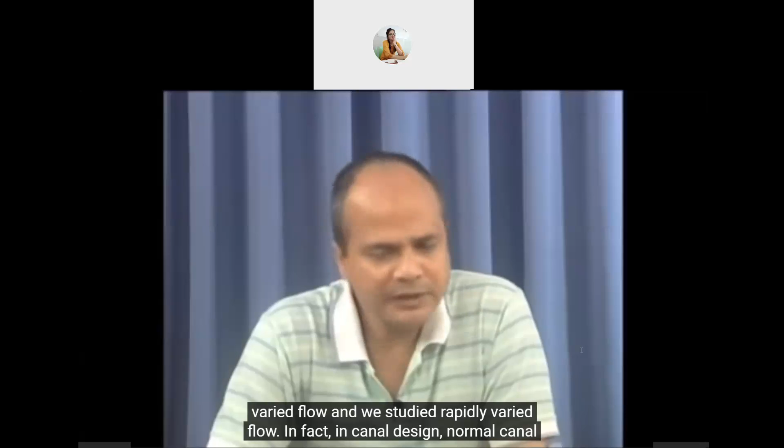Then of course we studied gradually varied flow and rapidly varied flow. In fact, in normal canal design, this gradually varied flow and rapidly varied flow concept doesn't come directly, but suppose in a canal we have a barrier upstream or downstream, then there will be some gradually varied flow profile forming, and in that case, for normal condition when we are designing a canal, suppose we are getting a particular depth in it.

Now suppose we think there may be some obstruction downstream, and in that case some gradually varied flow profile can be forming, and in those situations what will be the additional height required over the computed depth of uniform flow - those things may be required. Similarly rapidly varied flow also we may have to see where the hydraulic jump may be forming, and the concept of rapidly varied flow is also required in those situations.

Suppose we are narrowing down the canal to a very small width, then sometimes we need to see whether there will be afflux on the upstream, whether there will be a varied flow just near that constriction. So those aspects also we need to know.

When we are talking about design of canal, we should know that there may be channel. When we were discussing classification of channel, we mentioned that there can be natural channel or artificial channel. Natural channel is what we get in nature, like river or stream, and in those cases this concept of canal design or channel design might come in some issues where we are designing some hydraulic structure, and there may be some approach channel which is otherwise natural, but we need to maintain some of the conditions there.

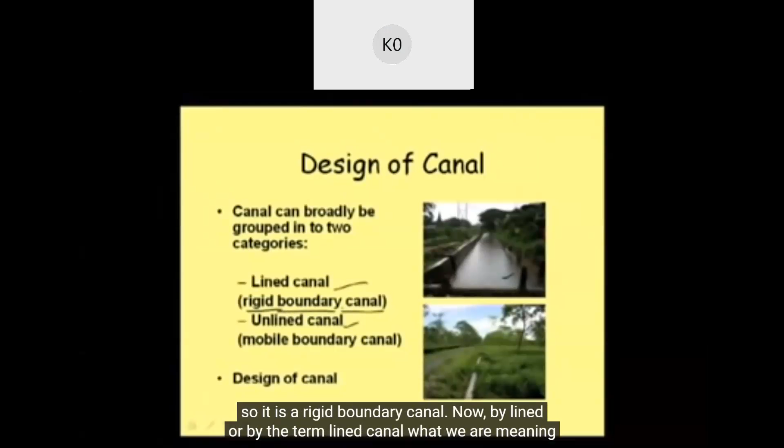By the term lined canal, we mean that during construction, we are providing some lining to the boundary of the canal, to the sides and the bottom. Those walls can be concrete, or sometimes we may decide to provide a wooden boundary. In hilly areas, I have seen people providing bamboo lining also. In some experimental situations, people may provide plastic lining as well.

If we are trying to carry some very important item, then it can be steel lining also. So canal lining can be of different types, and when we are providing those linings, we are referring to this as a lined canal.

Another point we should know is that by lined canal, our design concept is that this canal will not be eroded by the flowing water. So we completely avoid the thinking that this canal is ever going to be eroded, and other requirements will be deciding the canal design.

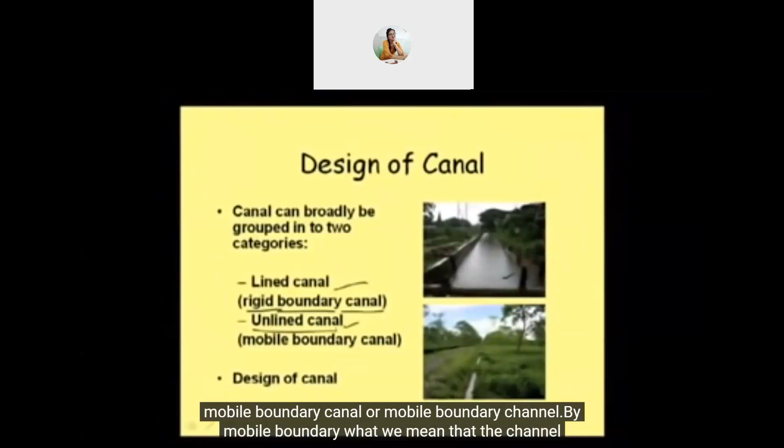When we talk about an unlined canal, we are talking about a mobile boundary canal or mobile boundary channel. By mobile boundary, we mean that the channel bed and sides can get eroded.

When we talk about this situation where it can get eroded, that depends on various parameters like the flow velocity, how much erosion can occur, what type of sediment the bed and bank are constituted of, the saturation condition, and particularly the formation through which the canal is passing.

Sometimes it may be an alluvial formation, meaning the bed material is silt or sand, and in that case it may be more susceptible to erosion. In other cases, the canal may pass through a non-alluvial formation, such as clay, where the susceptibility to erosion may be less.

But it also depends on whether, upstream, there is something because of which the water flowing through the canal can carry sediment. We need to ensure that this sediment does not get deposited into the canal and block the path. So all these issues come into play.

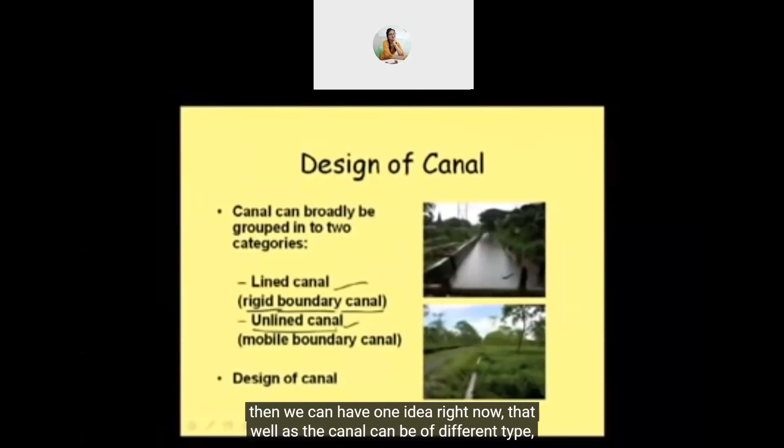With this understanding, we can now see that as the canal can be of different types, the design concept for these different types of canal will of course be different. So let us see what can be the design concept of a lined channel.

Okay, what can be the design concept of a lined canal? First, let us talk about rigid boundary canal, meaning which is not mobile. The boundary is rigid, meaning it is a lined canal.

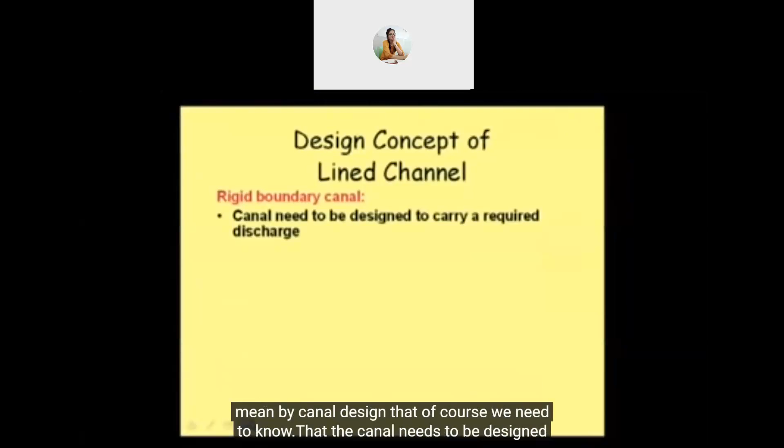First point, what we mean by canal design: of course we need to know that the canal needs to be designed to carry a given amount of discharge. First, from other criteria we should know what is our requirement. The basic requirement of a canal is that it should carry this much discharge, that is the volume of water that needs to be carried. So we need to design this to carry that sort of discharge. Now when we say we are designing, what are we basically doing?

Discharge is given, and then the slope of the channel. When we say this is our design canal, what do we need to give? We need to say, okay, this is the bed width of the channel that needs to be provided, this is the depth of the canal that needs to be provided, and of course we can say this is the shape. It can be rectangular, it can be trapezoidal, it can be triangular, it can be circular. So different types of shapes we may suggest, and our design may involve all those things.

Then we can suggest, well, this canal will have to have a slope of this much. But when we talk about the slope, we can see that the slope of a channel depends on the topography. That means we have hardly much scope to play with that particular parameter. We need to design a canal in a particular locality or location to carry discharge from one point to another, so the natural slope or natural topography will guide what should be the slope. There we can play by a very small amount.

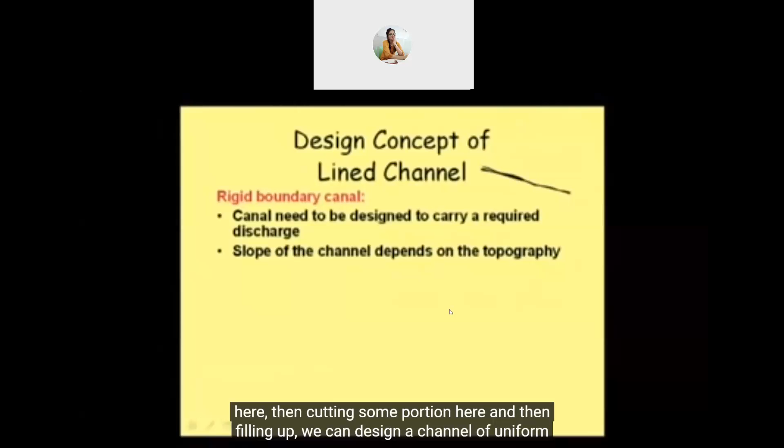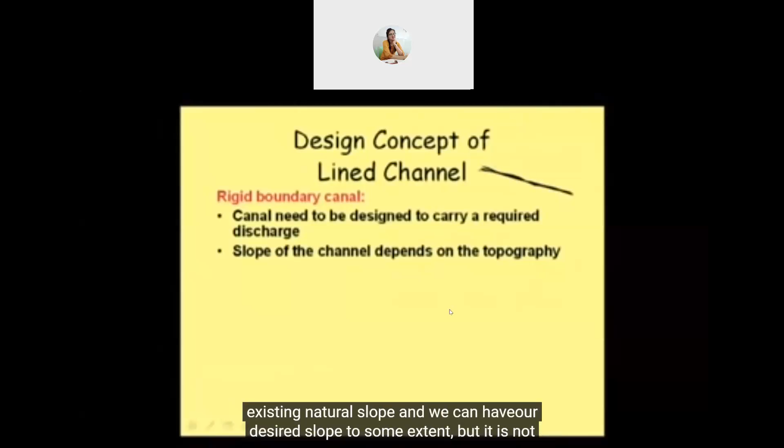For example, say this is the canal and the natural topography is suppose like this. We may not design a canal like this and then that and in this way. But we can design a canal by filling up some portion here, then cutting some portion here, and then filling up, so we can design a channel of uniform slope. So marginally we can change the existing natural slope and have our desired slope to some extent, but it is not that we can change the slope grossly.

So generally when we talk about design of canal, we do not think we have enough opportunity to manipulate the slope. So we will assume this is the slope, or we will take the natural slope as our slope, and then we'll proceed for the design.

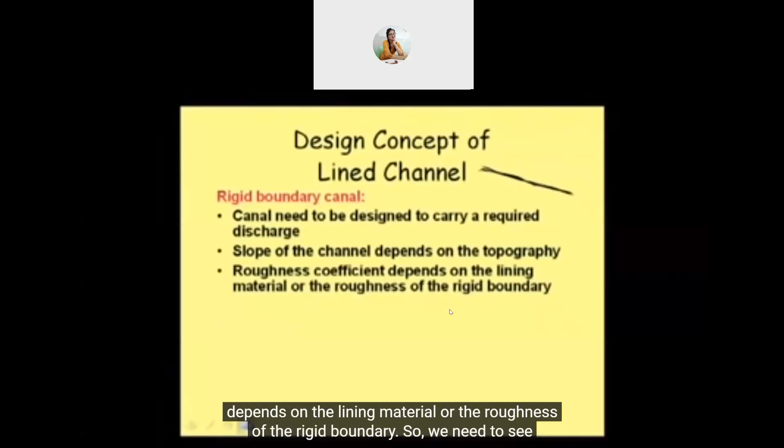Then another important point we were discussing is the roughness coefficient, which depends on the lining material or the roughness of the rigid boundary. So we need to see what sort of lining we are providing, and based on that we will decide our roughness coefficient n. In some cases, if by providing a particular type of lining our roughness coefficient decreases, we know that when the roughness coefficient decreases, the discharge carrying capacity of the channel will increase, because Q equals 1 by n

then it comes as A, then R to the power 2 by 3, as S to the power half. So if we remember that formula, 1 by n is there, so if the n value reduces, the carrying capacity of the channel increases. So in some cases we may have to change the lining also. In fact, for improving the channel carrying capacity, many times the side slope of the canal, the sides of the canal and the bed are lined with some finer lining so that we can have better flow through that.

Then another aspect is the shape of the channel, which depends on various constraints. Of course, I'm not writing it out very elaborately, but it depends on various constraints. Now, what can be those various constraints?

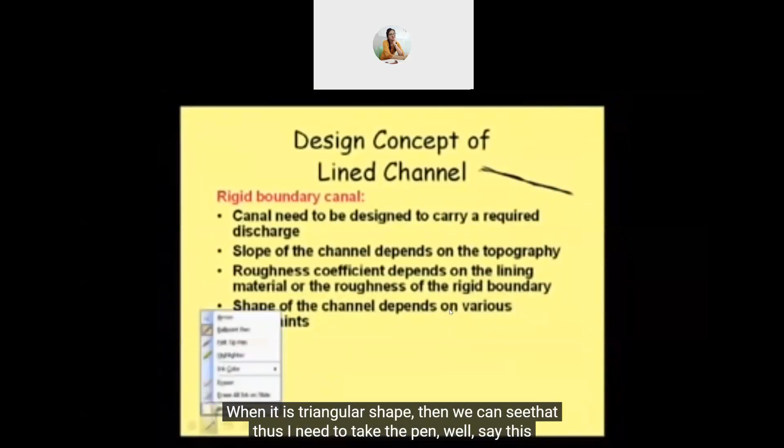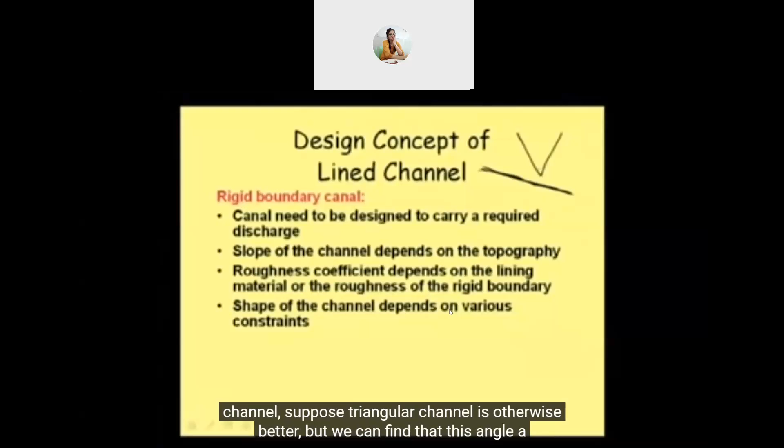Similarly, sometimes we may find that a triangular shape is better for some considerations. But when it is a triangular shape, we can see that this angle may sometimes be very narrow, and if sediment deposition takes place in this part, it may be practically difficult to clean those things, and that may be one constraint. I'm just giving you one constraint, but there may be several such practical constraints.

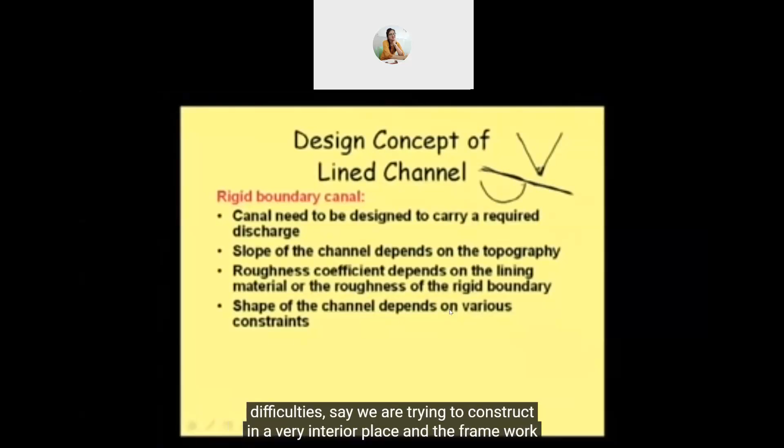Sometimes we feel a circular canal is better. If we construct a circular canal, it is most economic. But construction of a circular canal itself may have a lot of practical difficulties. Say we are trying to construct in a very interior place, and the framework required for constructing a circular canal may not be available there. The labor or manpower available may not have the expertise to make a circular canal. So there may be different situations which force us to take a particular shape.

As I was already telling, if we take a rectangular channel and this sort of cutting is there, if this is sandy soil, it will not stand, this will fail. And if it fails and comes here, this sediment will block the flow and create problems.

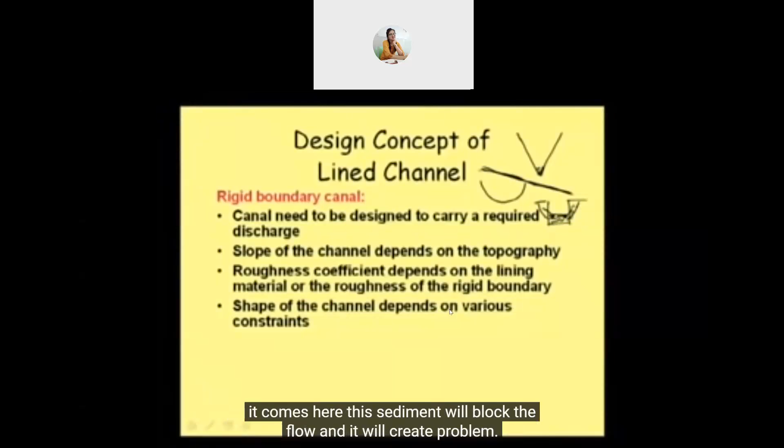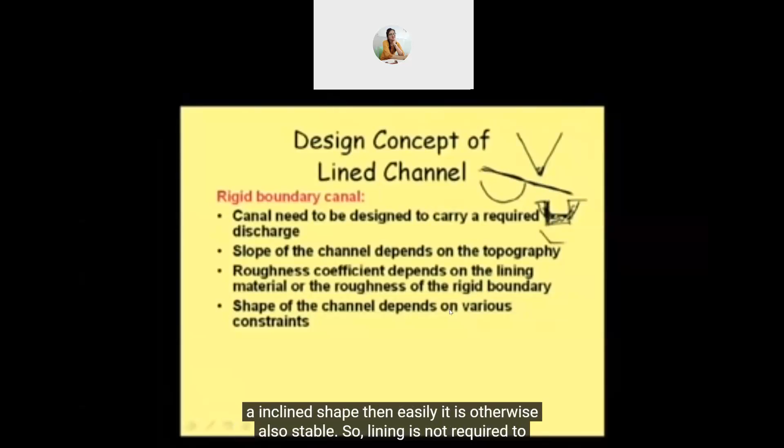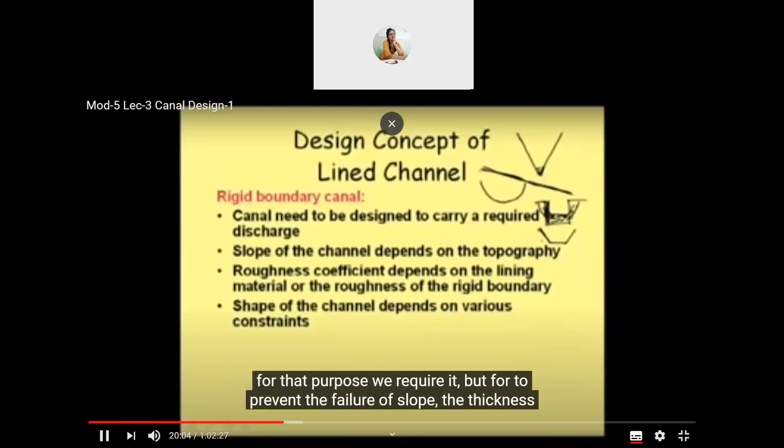If we give lining, the failure chance is less, but to prevent the failure, the cost of lining required may be much higher. Rather than that, if we give an inclined shape, it is otherwise also stable, so lining is not required to support the soil against collapse. For erosion resistance we still require some lining, but to prevent slope failure, the thickness of the side is not required, so this thickness will be less, and that way it may be preferred.

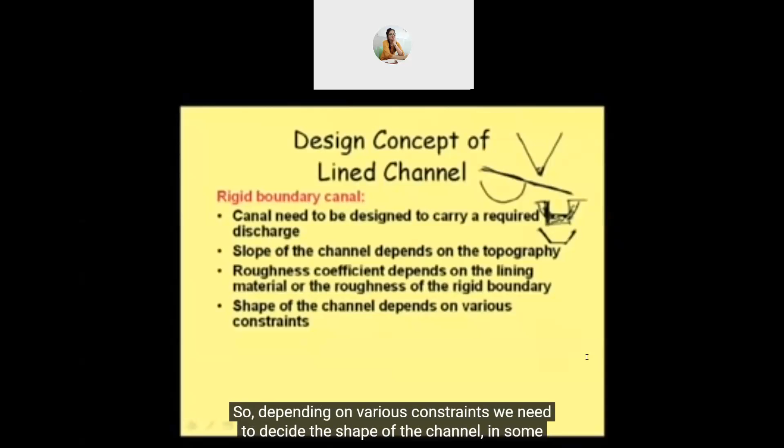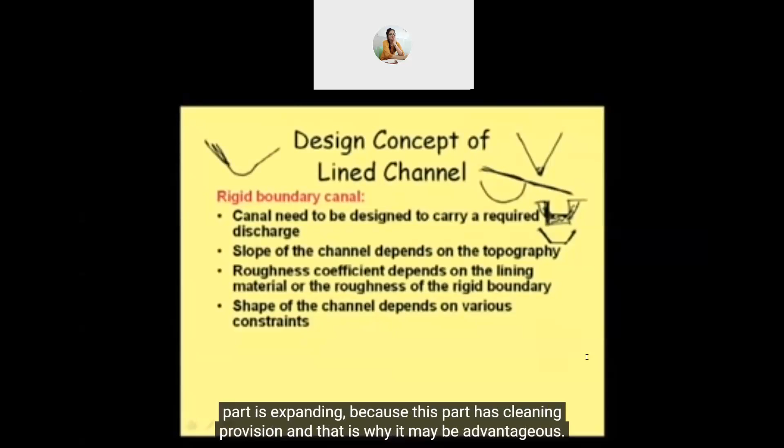So depending on various constraints, we need to decide the shape of the channel. In some cases, people try a channel where this part is circular and then expanding, because this part has cleaning provision, and that's why it may be advantageous. So in some channels we can go for that sort of shape also. Based on all this experience and understanding of the real situation, we need to decide what will be the shape of the channel.

Once we have the shape of the channel, we must also mention another point, the slope. We are saying it is trapezoidal. Now, depending on the different type of soil, the slope of this trapezoidal channel, this theta, may change.

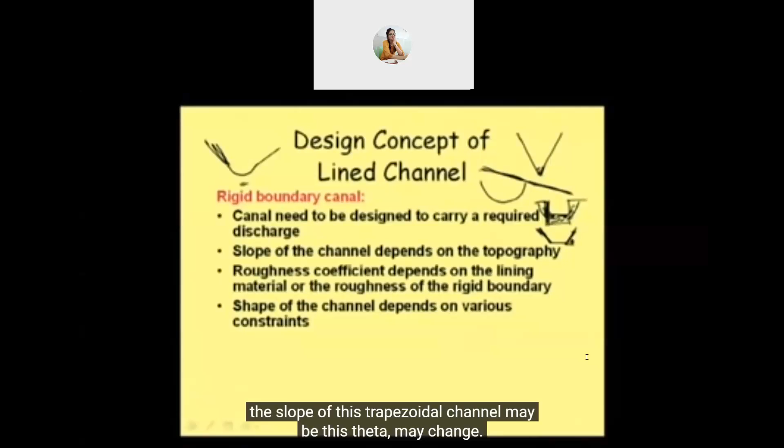Then, if all these things are there, say we have the discharge, we know the roughness coefficient, and we've decided whether our channel should be trapezoidal or rectangular, whichever is most advantageous. And we are having the slope of the topography also. So after having all these things in hand, our target will be to design the canal so that we can achieve the highest economy. That is the most economic section we need to design, so that its cost is less. When we design following this basic concept, the channel shape we get is called the most economic section, also called the hydraulically efficient section, or the best hydraulic section.

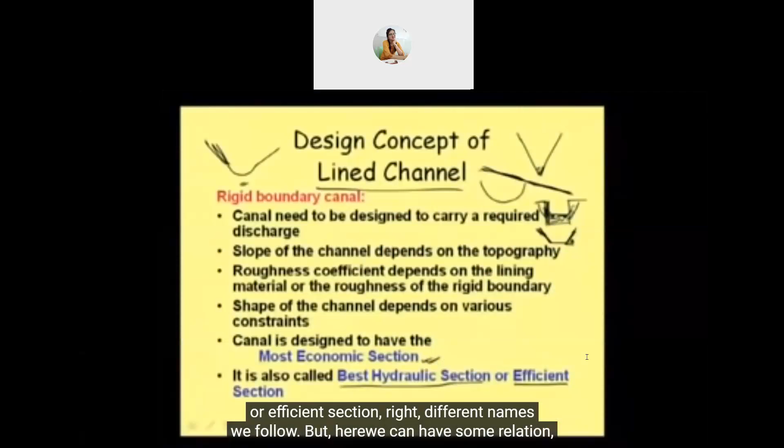So that way, in case of design of a lined canal, our objective is to design the canal as the most economic section or the best hydraulic section. These are actually the same thing, just different names we follow, but here we can find some relation between them.

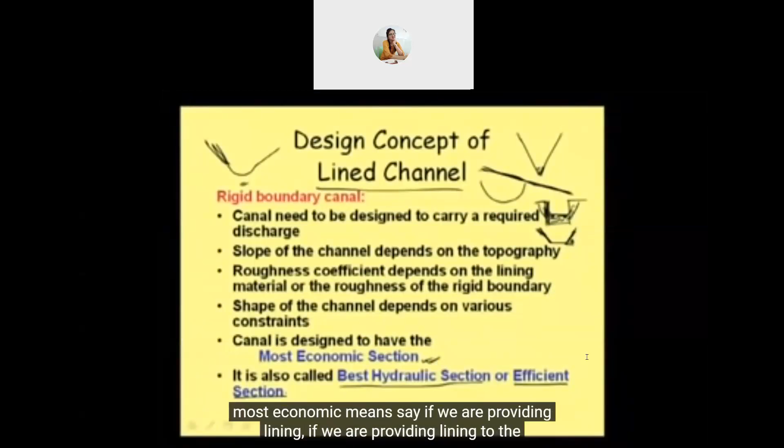Most economic means, say if we are providing lining to the canal, then our target, if we try to reduce our cost, is that our perimeter should be minimum, because lining is provided along the perimeter. So if we try to reduce the cost, this perimeter length should be minimum. That way we call this the most economic section.

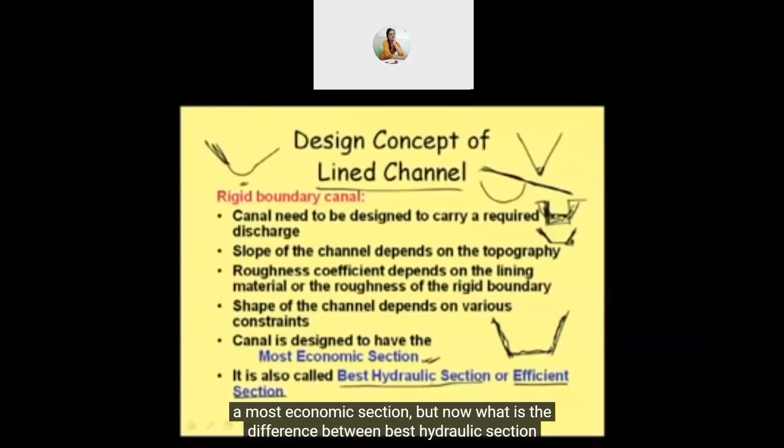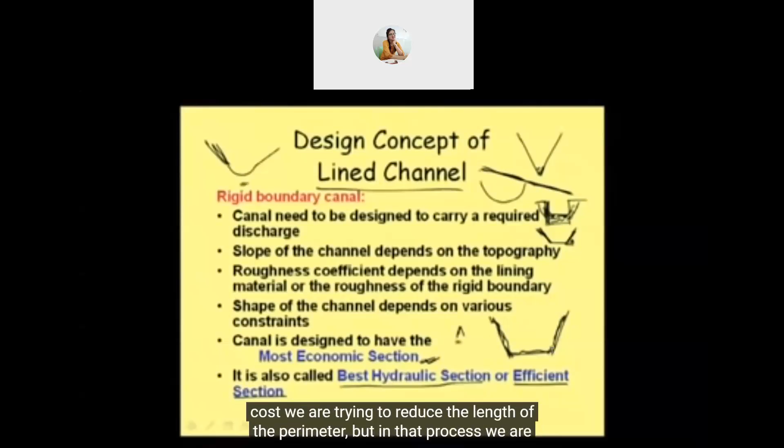But what is the difference between the most economic section and the best hydraulic or efficient section? You see, the most economic section comes because the cost is less. Now again, suppose the same area is there, and to minimize the cost we try to reduce the length of the perimeter. But in that process, we are achieving another objective.

The resistance to flow comes from the perimeter. If the length of the perimeter is more, resistance to the flow will also be more. When resistance is more, for the same cross-sectional area, if the wetted perimeter is large, resistance will be more, and as such discharge will be less. Our objective will always be to carry the maximum discharge, or the required discharge, at minimum perimeter, provided the area remains the same.

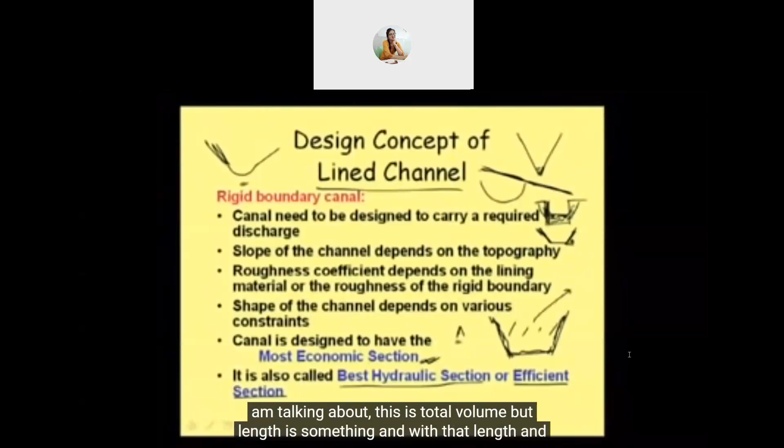If we talk about excavation, it will depend on the sectional area. The volume of excavation equals the sectional area multiplied by the length. Now if this area remains fixed, that excavation volume, A into L, will remain the same, and as such the cost of excavation will remain the same.

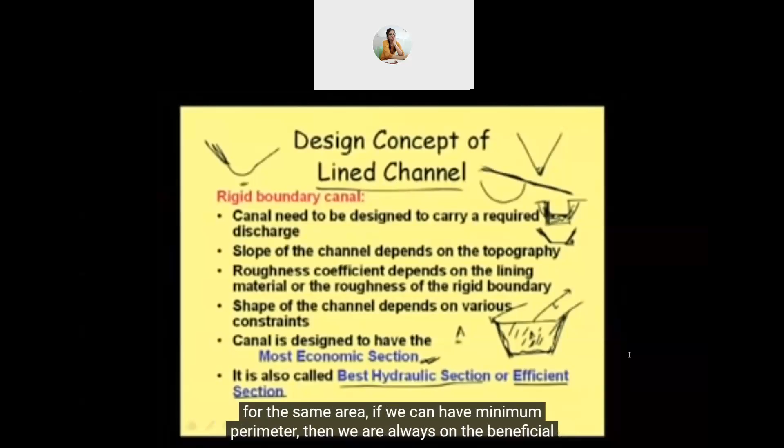Now, for the same area, if we can have minimum perimeter, we are always on the beneficial side—from the economic point of view, that is the cost of lining, and from the hydraulics or discharge point of view. For the same area, discharge carrying capacity will be more if the perimeter is less. That's why we design the canal with this concept of the most economic section, or best hydraulic section, or efficient section.

But it may not always be possible to design the channel as the best hydraulic section. We'll discuss what makes a section the best hydraulic section. Suppose for a rectangular channel, the best hydraulic section is one where the bed width equals twice the depth. We'll derive that later, but let us take it that for the best hydraulic section, the bed width should be twice the depth. Now, by that concept, to carry a particular discharge, we can have this section, with a given bed slope.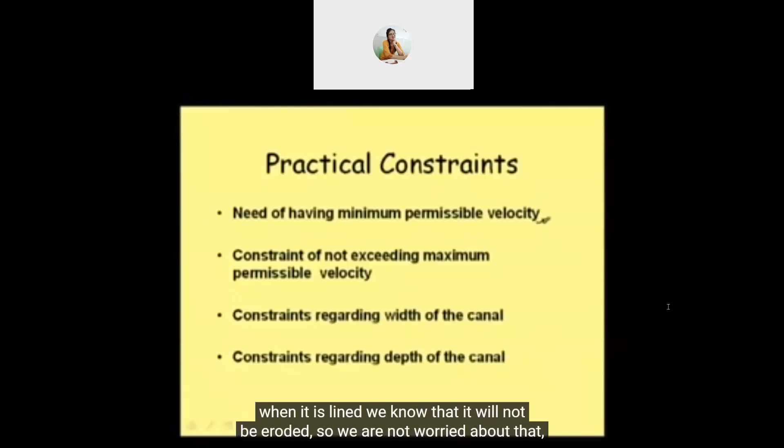When the canal is lined, we know it will not be eroded, so we are not much worried about that, though there is always a maximum permissible limit too. But we are more worried when we are designing a canal that may carry sediment-laden water flowing from upstream. In many cases, we find that in a city, suppose we are designing a canal, and that canal...